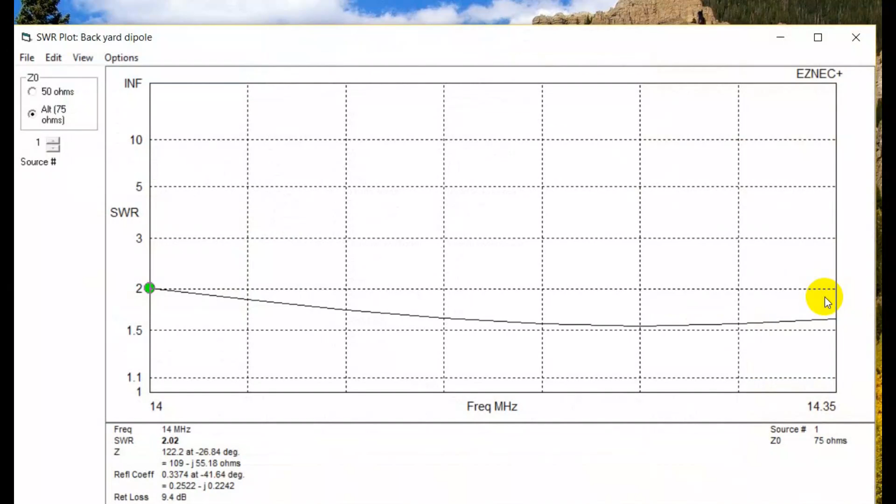So let's first of all take a look at the SWR. Same, we'll run it, and okay, we're at 75 ohms. We're not too bad here. It's under 3-to-1. It's 2-to-1 here. Note that the actual impedance's 122 ohms. So you could do, let's say, a 3-to-1 balun, which would be 150 ohms.

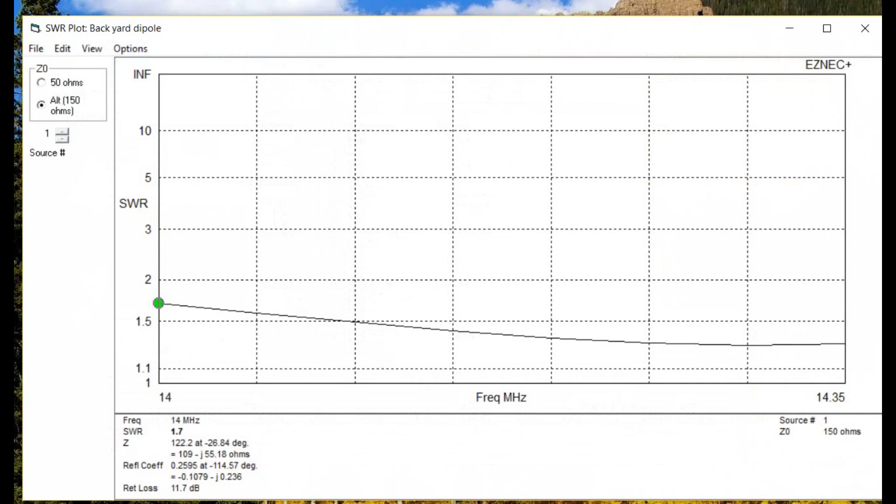And let's just do that as our alternate right here. We're going to do 150 ohms. You'd have to do that with a 3-to-1 balun, which you'd have to make yourself. You can't find those commercially. But now let's view the SWR, and we're going to recalculate it because I've made a key change. Okay, now with 150 ohms, it's a real nice antenna, and it does cover the whole band.

All right, so let's just take a look again now that we've calculated that. We see that we've got a full wavelength dipole fed at the 25% point here. Well, now the question might be, is this antenna any good on other bands since it's an off-center fed dipole? I think we're going to find that the answer is not so. Let's take a look at the SWR again.

Now we're going to calculate it from 14 to 29 megahertz, and we're going to make these 0.1 here because otherwise it'll take forever to run. So it's running, and you can see the megahertz that it's determining here, and it's going to get bigger and bigger as we go. What we're going to do is see the SWR starting at our fundamental frequency of 14 and going up to double that.

Okay, so our lowest SWR is at 14.3 megahertz, SWR 1.28. Again, note we've got a 150 ohm line feeding it. Now let's look over here. We've got a low SWR at what frequency? 21.5 megahertz. Isn't that interesting? That's 15 meters. And let's see how far we could go down to get to the bottom of, that's 21.2.

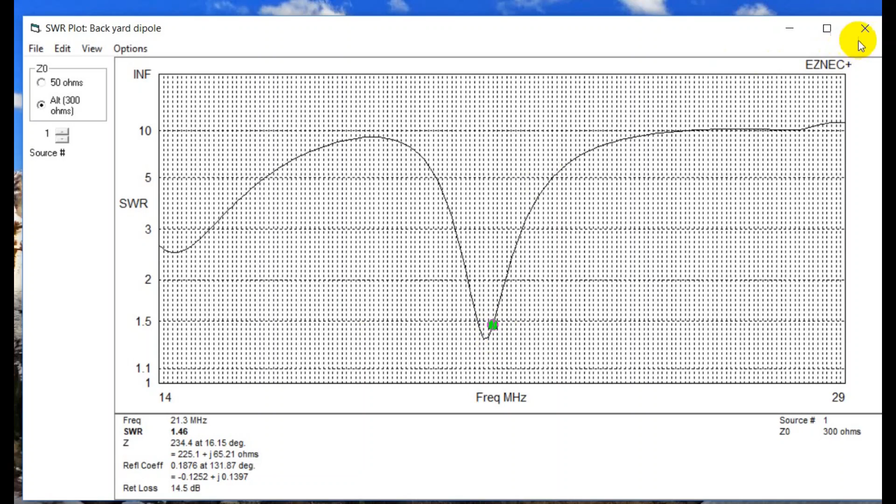Okay, now let's look at something, because this is important. We have not looked at plots. Let's look at this at the design frequency, which is for 14 megahertz. Okay, we've got some gain, 7.2, but look at the weird pattern. It's actually got a null that's broadside to the antenna, another bit of a semi-null that's off the ends of the antenna. Okay, that's an interesting pattern.

What is the pattern if we were to change the main frequency here? What is the pattern for, let's say, 21.2 megahertz? Okay, now let's look at the pattern, the far field plot. Ooh, that's weird. Okay, and it's not symmetric. See how this out here has got more gain than down here. This is about 2.5 dB down.

And this is because if we look at the antenna, view the antenna, here we are at 15 meters. We have, in essence, these are each a half wave. And there's our feed point right there, and so on. It actually works pretty well. But it does not give us that much.

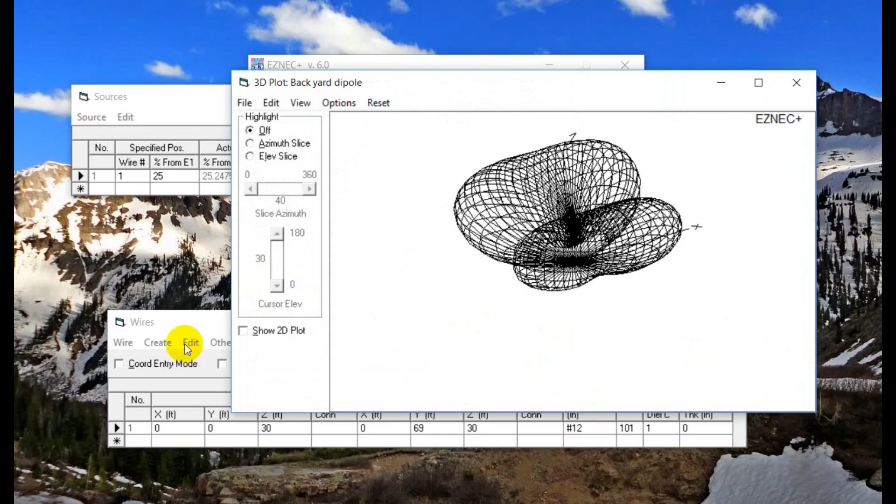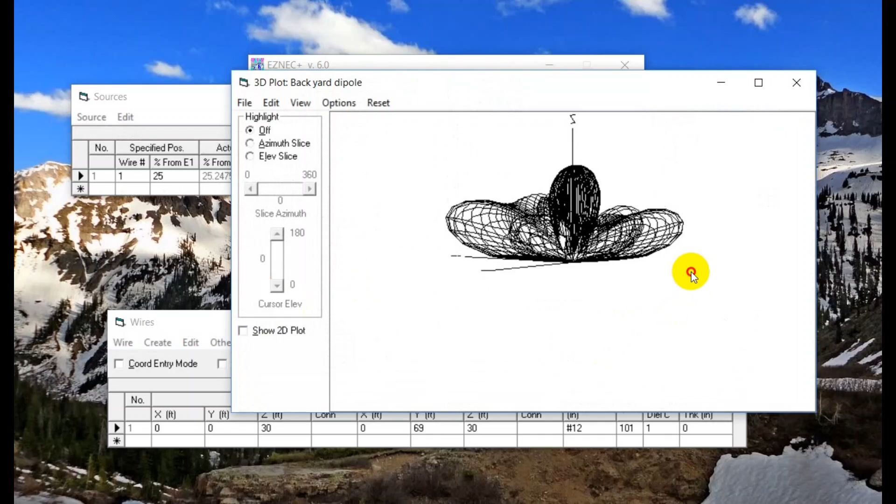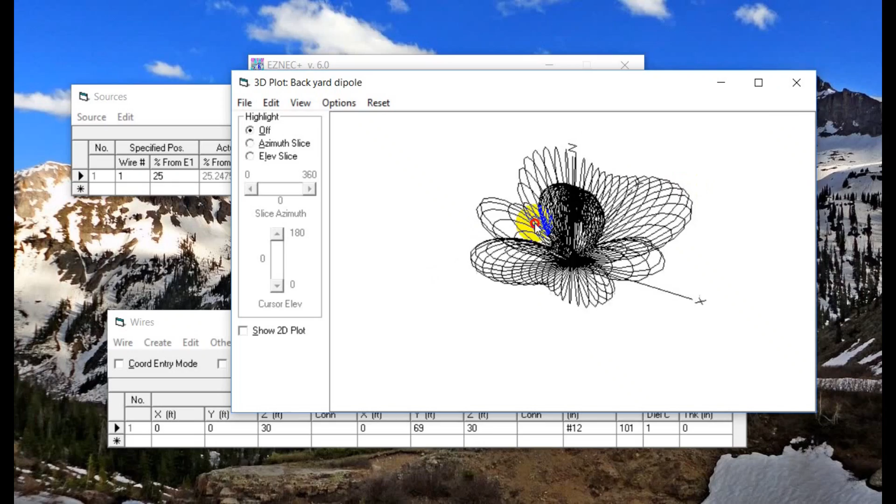Okay, but now let's go to frequency of 21.2. And now let's look at that far field plot. That is weirdness. And notice how much energy is going straight up. 15 meters is not a good NVIS band, so that is wasted energy. You've got some really weird lobes in there. Look at that. And they're not symmetric, as you can see. It's hard to visualize this thing because it's just weird, that's all.

Let's go to elevation on this thing. Where's my plot type? Okay, elevation. And do the far field plot. And what we're finding here, this is what happens when you put an antenna higher than a half a wavelength. In fact, it's not 2 wavelengths, but it's up there. It's higher than it should be for 15 meters. And so you get the beginnings of this second lobe here, and you've got a lot of energy going straight up in the air.

If you were to lower it to ground, closer to a half wavelength for 15 meters. Let's see, the wavelength is 46, so 23. Let's go down here and do 23 feet up. 23. And this end at 23. Okay, now let's go back and do that elevation plot again. And you lose the lump in the middle, and you get really only 5 dB again.

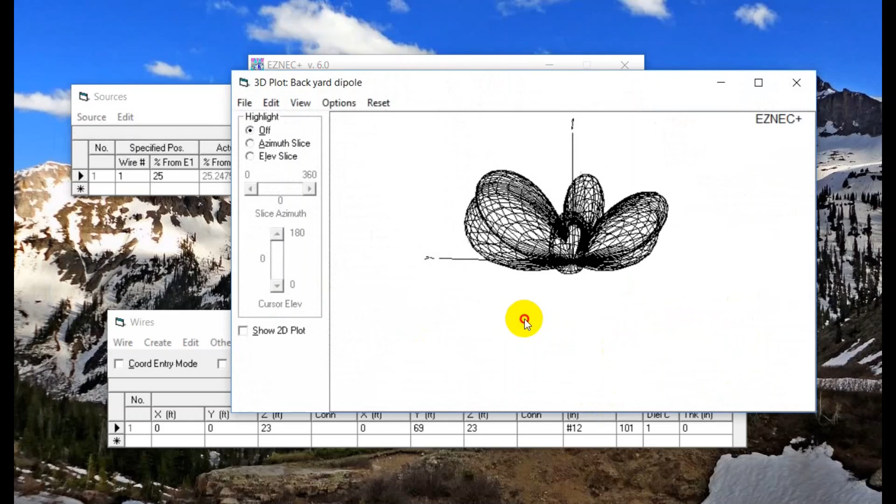Let's take a look at the 3D plot on this. This is fun. We're a little lower to the ground. Look at the far field plot. And so you've got energy going off in weird directions. And it is not symmetric, because we're not feeding it symmetric. This is a problem with off-center fed dipoles. You get non-symmetric patterns.

Well, that was interesting, wasn't it? Didn't quite come out the way that maybe intuitively we thought it might. We did get a weird antenna pattern on the thing. It is possible to match. It can be done, but you're going to need a balun or some other thing like that to make it work. And there's a pretty big reactive part of the impedance in there.